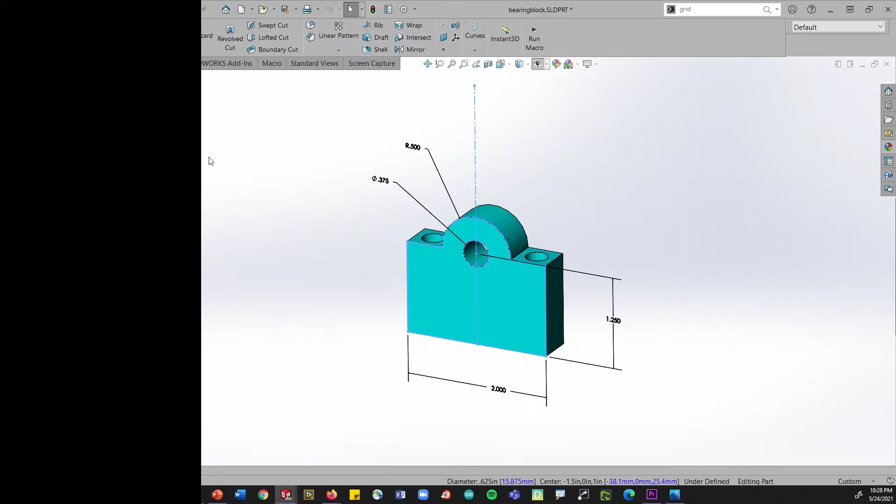Next piece that the students design is the piston, and like the bearing block, it has holes on different planes. It also has a chamfer feature on the bottom of the piston.

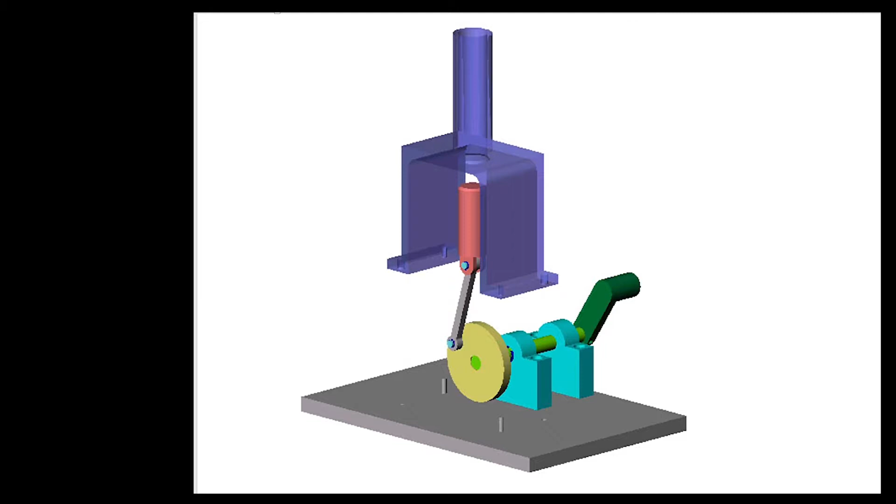Now it's time to make the assembly. Students use the parts they designed along with the parts provided in a library. First thing to do is bring in the base plate with a couple of dowel pins on it for locating.

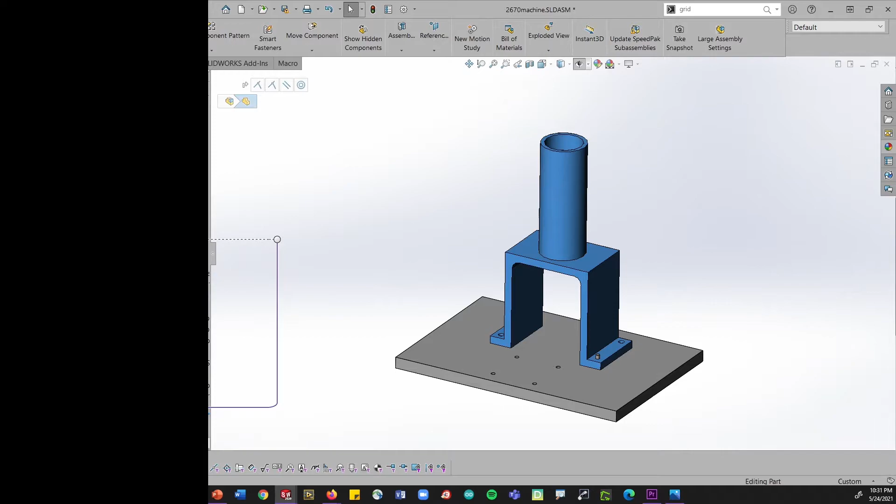Next, they'll bring in the housing, which will be located right on top of those pins. Great. The next part: those two bearing blocks that the students made. Those are located on the screw holes, but we don't have to put the screws in to hold them in place because we're in a virtual world.

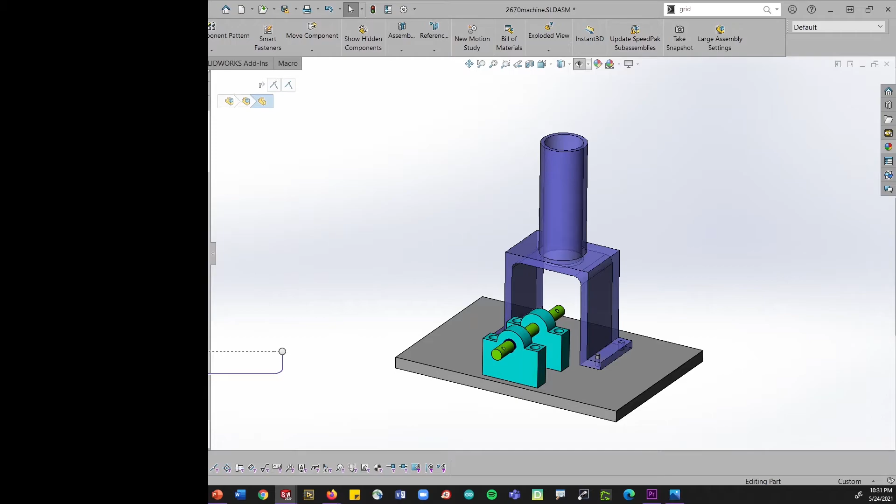Okay, now it's time to bring in the drive shaft. And we can locate the drive shaft by putting some retaining rings on so that it holds itself in place around the bearing blocks. The crank wheel is going to come on to the far end of the drive shaft now. And we can rotate around and see how that looks.

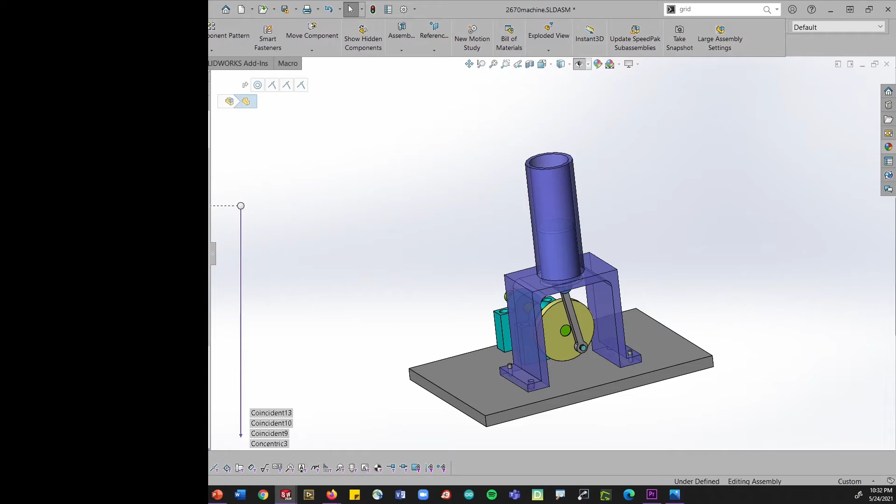It's got a hole on the crank wheel. We'll put a pin in there and then put the connecting rod on that pin. Next, we can put in the piston and a pin that will connect that to the connecting rod. Okay, let's rotate around and we should add a handle onto the drive shaft.

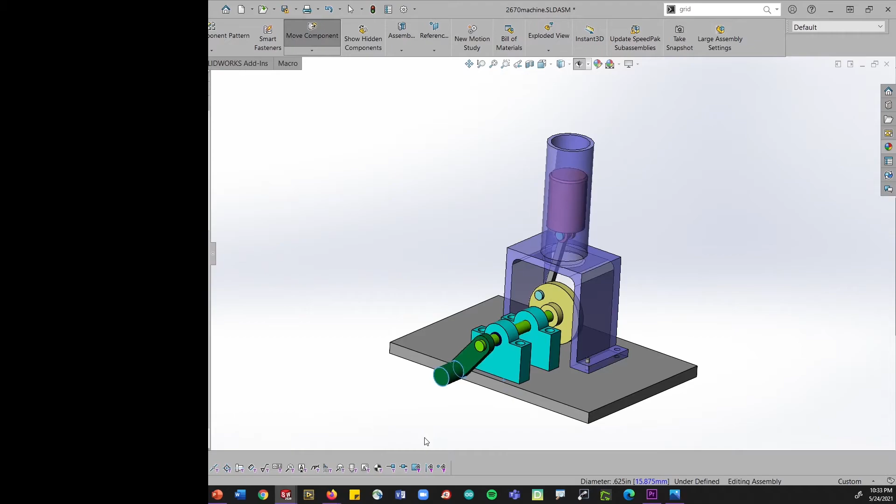At this point, if all the mates are correct, which probably won't happen the first time, but if all the mates are correct and you turn the handle, we should get the machine to work, the crankshaft pushing the piston up and down.

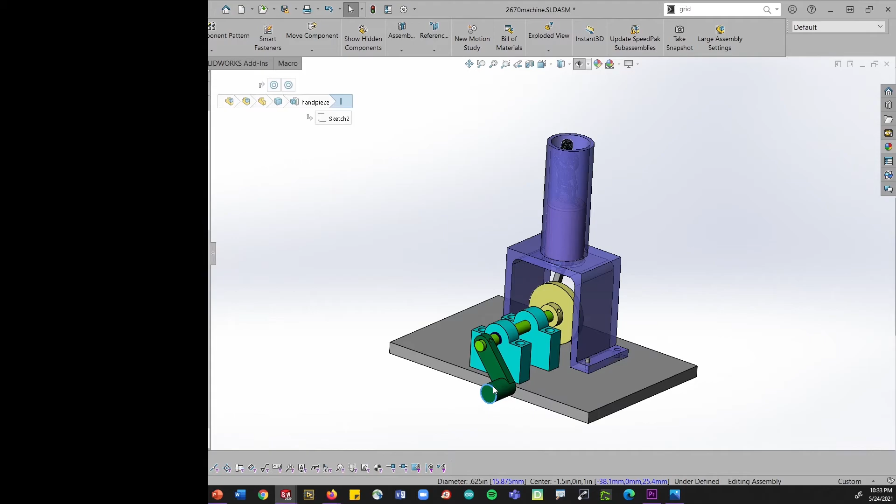Okay, to make this a little more fun, we're going to bring in another object, put it on top of the piston. We may have to scale that object to get it to fit. And now when we turn it, you can see somebody popping up and down. Let's zoom in and see who that is.

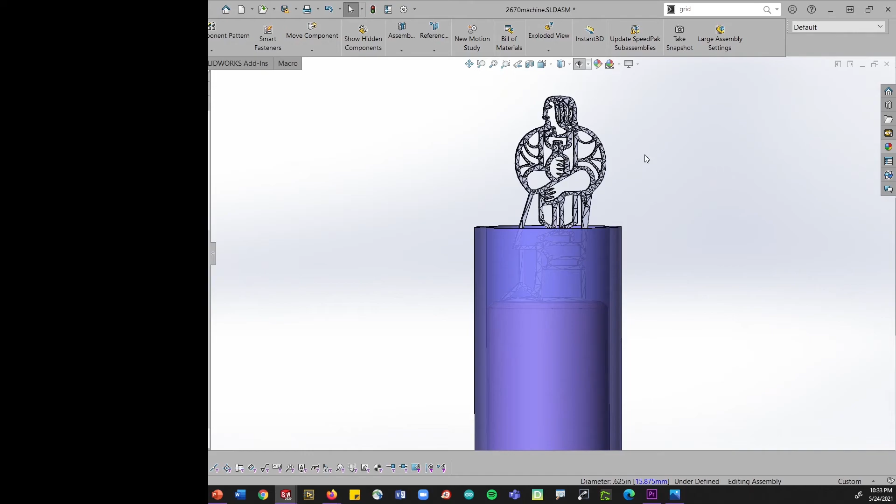Ah, it's from the MIT logo, Mens et Manus, mind and hand. This is the hand guy who's there with his sledgehammer, ready to do some real work. Let's zoom out.

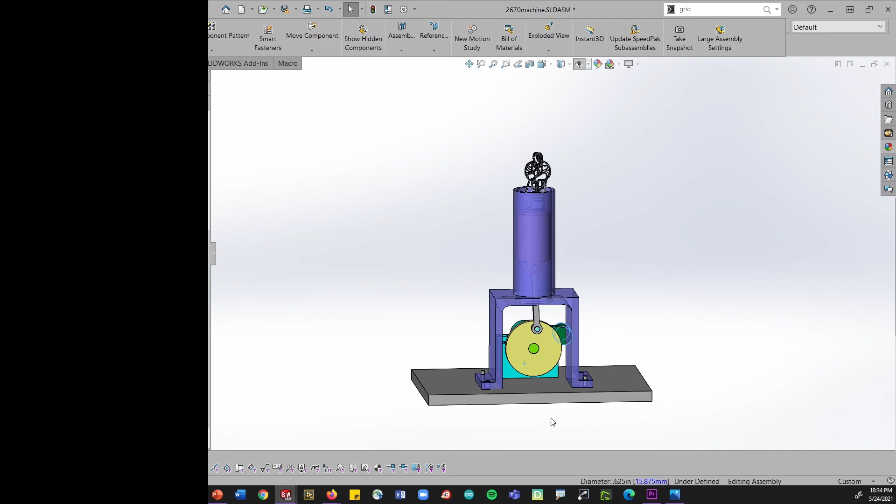And the purpose of this exercise now was for people to see parts of design as well as parts of modeling. So now they're going to model with the design intent, saying, well, if I need these things to locate to each other, maybe I should set those features up first and then design around them so that even if I change the size of some of these components, all the mates will still work. And that's it.